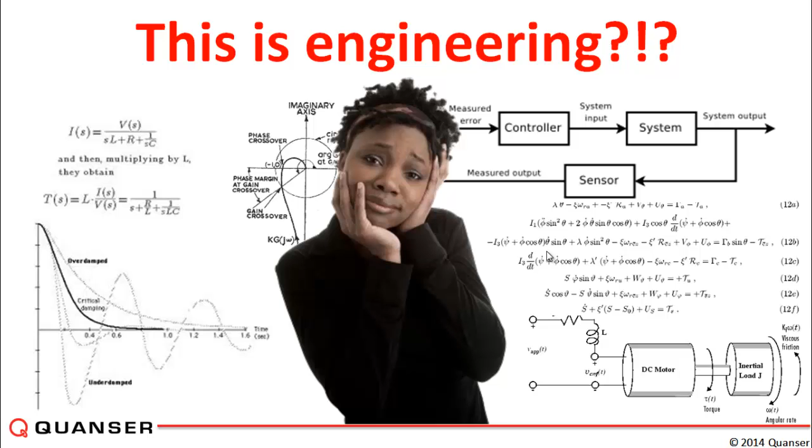I'm glad the slot for this presentation is at this time, because the previous presentation, especially what Ray began with, lays a great foundation needed to make better sense of this one. Today we'll continue the discussion and talk about whether our engineers and the graduates of today are ready for the great challenges of engineering present in our society. We're trying to address whether what we're doing in engineering departments when it comes to teaching is enough to get them ready to address the grand challenges of tomorrow.

At Quanser, for the past couple of decades, we've been trying to wrestle with this challenge. To address it, we have a wide selection of experimental platforms for teaching and research in control systems and mechatronics, and that's our history.

But more than talking about our history today, I want to talk about the higher level objectives and goals we have. Many of you or your faculty colleagues are involved with teaching courses in mechatronics and robotics, with the ultimate goal being to design a system such as this, a space rover.

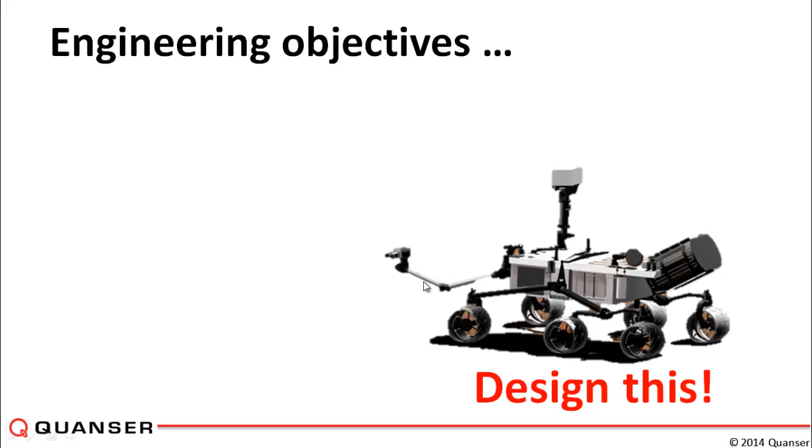We start with platforms mentioned earlier, such as Arduino and Raspberry Pi, which are gaining a lot of momentum and popularity these days, to program small hobby robotic kits at the undergraduate level. Students feel the disconnect, and we feel it too, between what happens at the programming level of that lab robot and what the reality is.

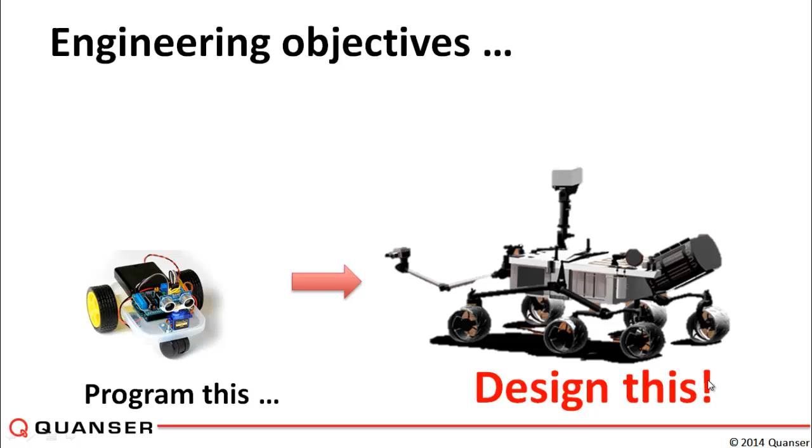One of our challenges is to make sure that the fun of programming is harmonized with the theoretical background and academic knowledge students need in order to be complete systems engineers, capable of being multidisciplinary enough to address requirements like measurement, modeling, classic control, real-time control, and overall approaching the problem as a systems engineer.

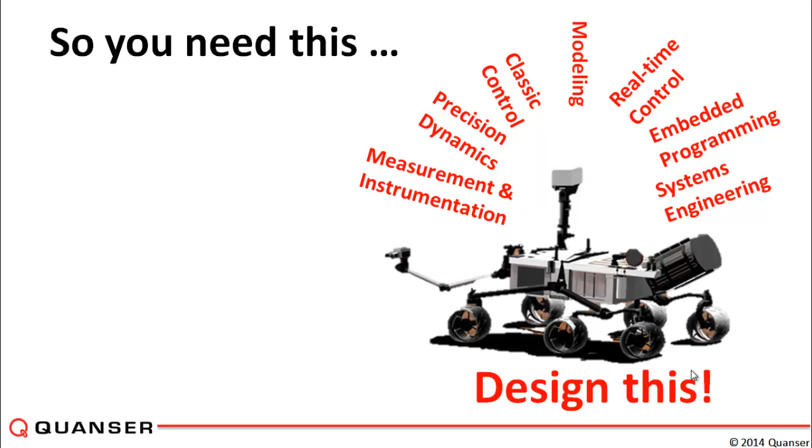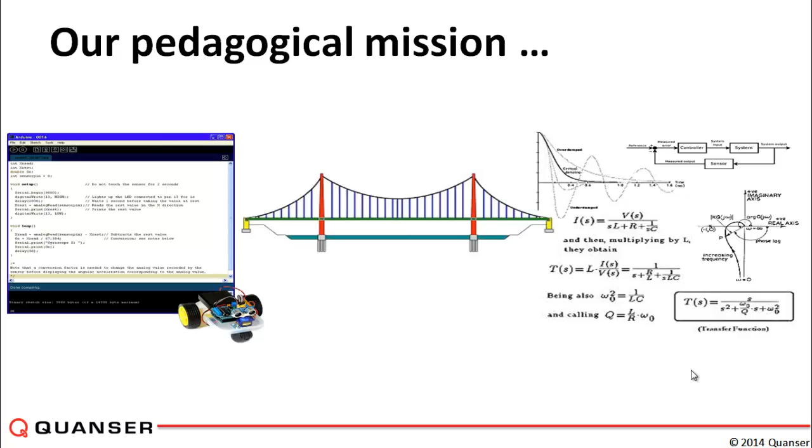Another way to define that challenge is to bridge the gap between the fun of programming that gets a robot to move and the mathematical background and abstract theory behind it, which is a very important requirement. For this audience, that bridge should probably look something more like this.

Before moving ahead, let me define a sub-goal: throughout the rest of this presentation, I want to share some ideas we're playing with in order to harmonize the fun with the theory, because both are of equal importance to us.

Throughout this presentation, I'll try to give the storyline of the life of a student coming into the school and then graduating and going out. They come in very curious, very keen, very excited, ready to learn and get involved in some of the applications they've seen so far as real engineering challenges.

Last year, and throughout some of the ECEDHA webinars we've given, we introduced an idea we've been playing with for a while: when it comes to teaching controls at an introductory level, we try to bridge the gap by bringing a game-looking application into a classic control teaching lab. So I'm going to play the video.

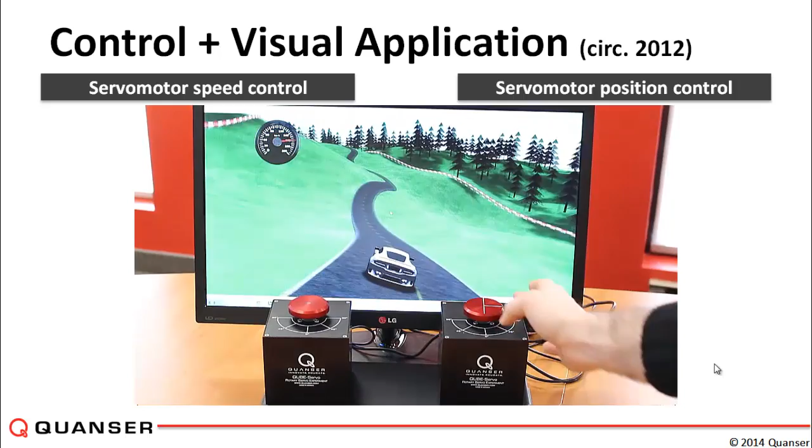What's important here is that not only does the application look like a game and seem very cool, but those two DC motors are introducing real dynamics into the whole simulation loop. As you interact with the motors, you can see that you can affect the performance of the car.

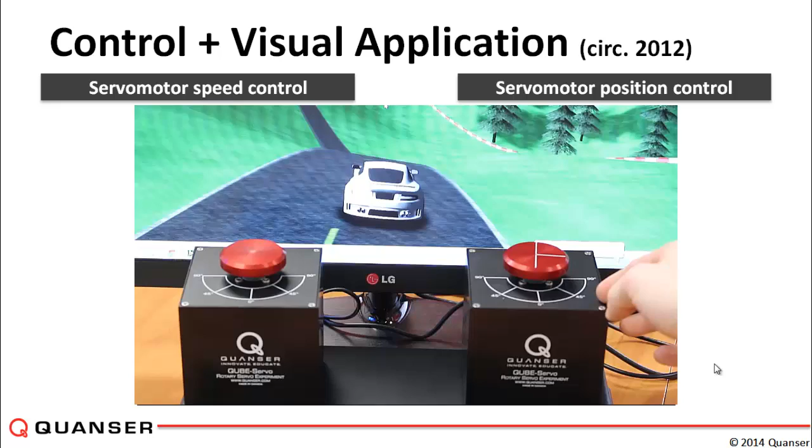And here we have the left motor representing the speed and the right motor representing the position of the car. The devices are acting as hardware in the loop devices in the entire simulation cycle, which is also a technique widely used in industry, and it's now being used at undergraduate level. That's what we introduced over the past year or so, and we've been playing with.

So moving ahead, before introducing this is how controls was taught in undergraduate labs. There's a device, a DC motor, that was usually looked at as the star of the show. And that's what I want to argue throughout the rest of the presentation, that's not the case actually. So the servo was the star of the show.

We have some software environments such as LabVIEW, which takes charge of the control and data acquisition and interfacing to hardware. And then we feed it some abstract signals and study through that the concepts of modeling, PID, speed, position control, and all the classical control topics that come with it.

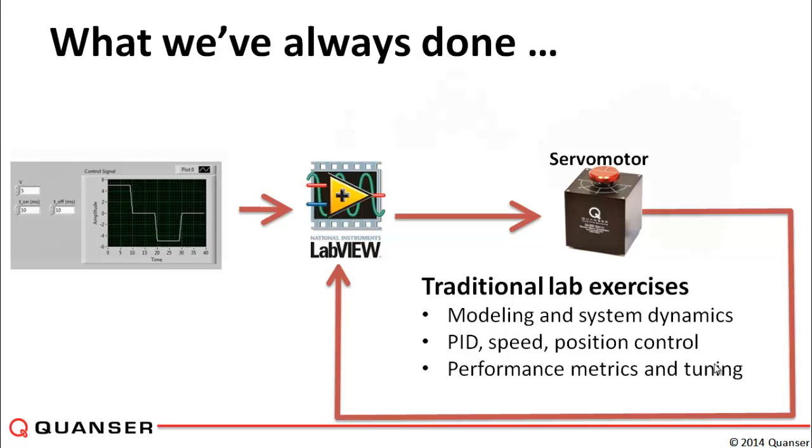So what happened with the QDS or the driving simulator example that I showed you was that we added a hardware in the loop application, and we wrapped the whole lab with this application, which is very rapidly interchangeable, and in that case was an automotive application.

So not only were we covering again the classical concepts that I just mentioned, but through this addition of game controller input devices and also the automotive model, it now opens the door into a much wider range of applications and teaching topics that students will get a chance to work with, not only on the classical control side, but also things such as the main applications, sensors and encoders, the fidelity of the model, signals, data acquisition and filtering, and even human factors, because there is user interface design involved, and there's a lot of parameters that you wouldn't normally touch on if you were just teaching classic controls.

Keep in mind that we are still using the same two platforms, but now instead of looking at them as the star of the show, we want to look at them as a system component of a much bigger system and solution that we're throwing in front of the student.

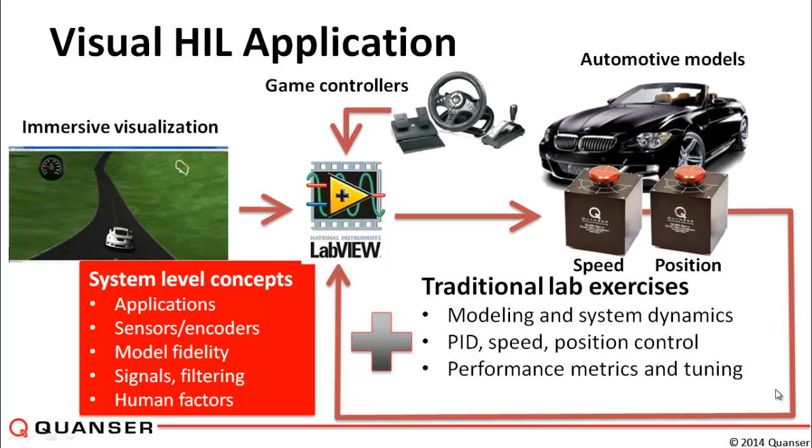So a little bit about that QUBE that we saw. It's basically our new DC motor control experiment that's recently designed. It's our latest technology in DC motor control, and it's designed to be affordable to equip multi-workstation labs, and it's designed specifically for teaching at undergraduate level in controls. A little bit more about that is coming up shortly.

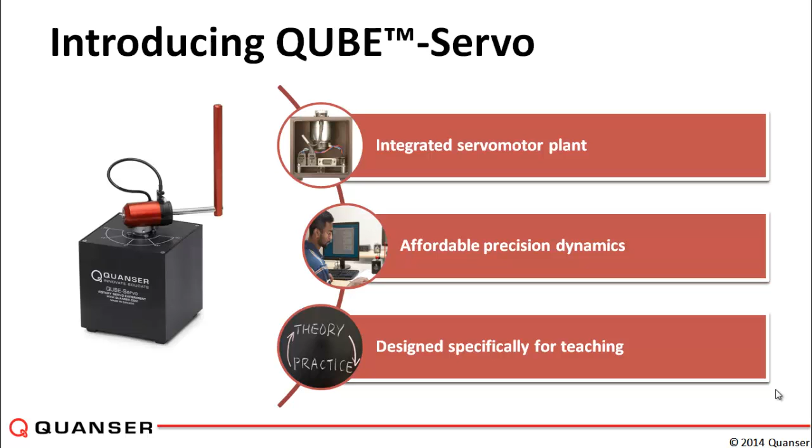So now I want to move to the second part of the storyline, where that curious student we saw at the beginning is now starting to think. When they come and start working with these devices, they have to think in order to get them to do what we want, what we're asking them to do.

And in order to do that, of course, we cover all of the classic interesting control topics: modeling, stability, frequency domain analysis, time domain analysis, and in more advanced courses, maybe state feedback, LQR control, observability, and things of that nature.

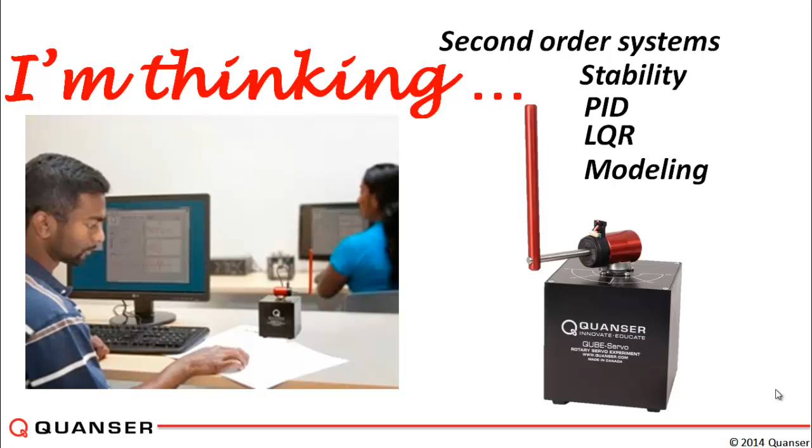But again, going back to the beginning and looking at the QUBE as the star of the show and as a control plant, I just want to show through this video that it actually does work, and it does what it's supposed to do as a control plant, satisfying the objectives of a control problem to swing up and balance the pendulum, which is one of the most famous problems in controls. It does that, and that's great. And through that, we cover a lot of material in basic control theory.

But now, what if we wanted to think about the QUBE as a system component into that whole objective that we defined for ourselves at the beginning? What if we wanted the students to actually do a little bit of engineering? This couldn't match any more perfectly with what Ray showed earlier on when it comes to doing engineering.

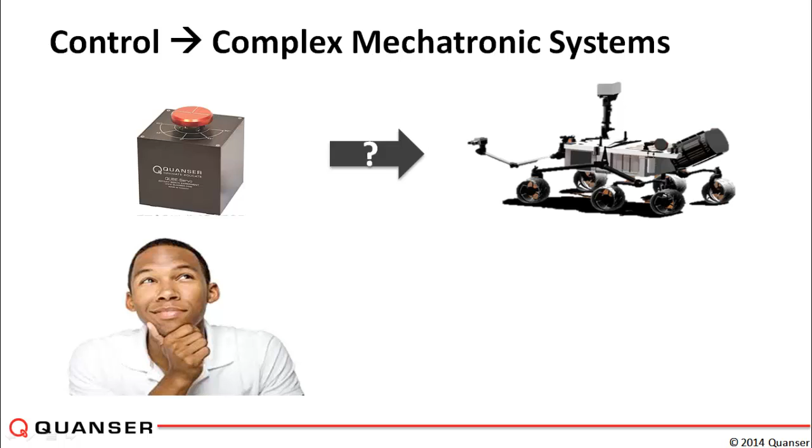And it's now time to actually introduce you to another new product released by NI, called the myRIO. I'm sure we're going to hear a lot more about it throughout the conference. But when you put the QUBE together with the myRIO, you have this very powerful platform that is now a complete solution for systems design, and not just for control teaching.

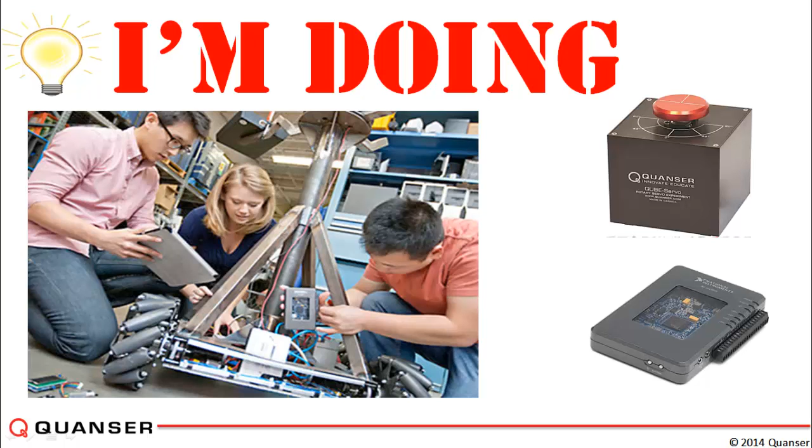This is a video from earlier last year from NI Week 2013, where we wanted to prove to ourselves, to NI, and to everybody else that while the NI myRIO is a device targeted at student design projects for undergraduate, master's and PhD level, it's definitely capable of doing computationally intensive tasks such as controlling a quadrotor, taking advantage of its low footprint, small power requirements, and capability to run on an unmanned vehicle.

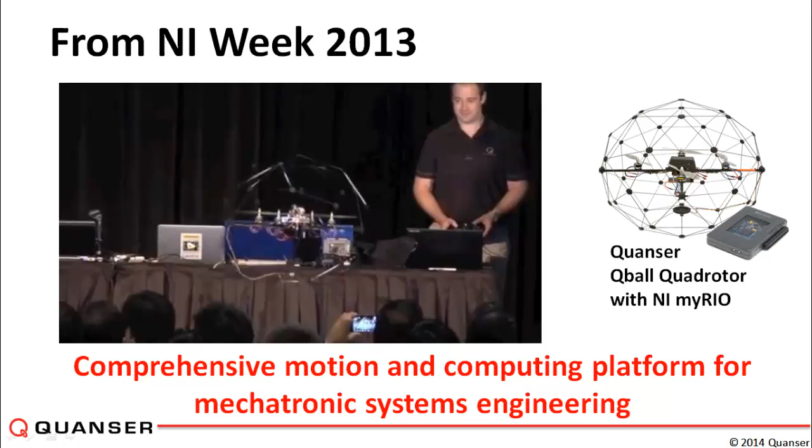So it's definitely great, but none of us have the budget or luxury of putting a 20K quadrotor in front of every undergrad student. So what's the next best thing we can do? That's when we started putting together the QUBE plus myRIO solution.

But before talking more about that, there's this cool video I wanted to show. This is a device on the QUBE that normally doesn't come with it. It's not even designed or offered as an official product.

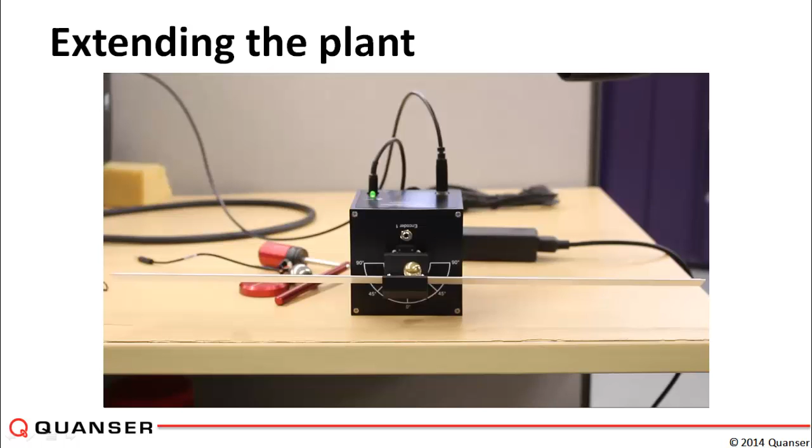For those of you involved in controls, this is a nice technical demonstration of observer-based control and observability. But for those who don't care about controls as a system, you can see that with some common hardware store parts and a small magnet, we were able to create a completely new experiment with an existing device acting as our precise dynamics. We, or a student, could have gone ahead and put this together, opening the door into a much more advanced control problem that wasn't offered out of the box with the QUBE.

And that's the main point I want to get across here. With some common parts and creative fabrication, students now experience a systems engineering or design experience rather than just a classic control problem.

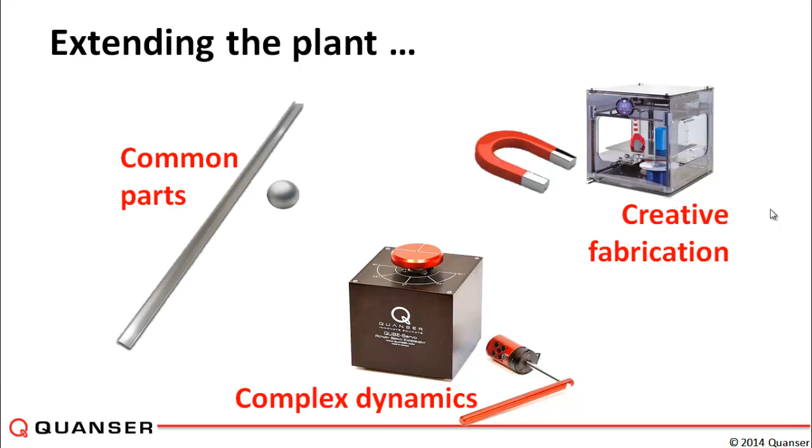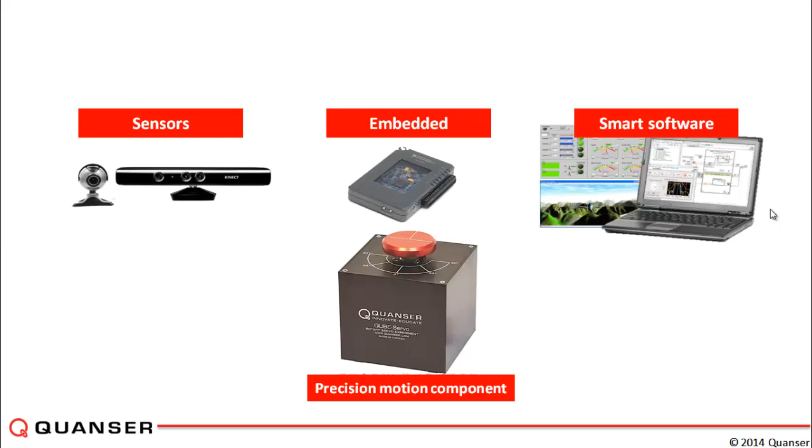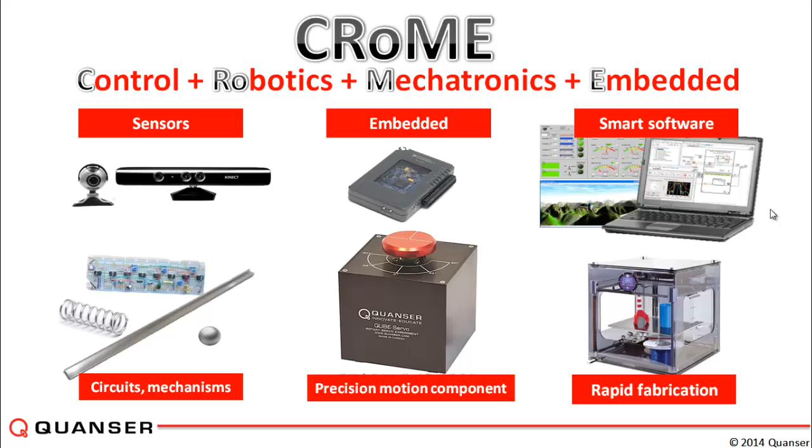Sorry I have to go through this a bit faster than anticipated because of the videos. Another example that shows how powerful this solution is: using rapid prototyping tools such as 3D printers, which were used to design that module, we came up with this next example where, through a Kinect or camera which the myRIO is definitely capable of supporting and computing on, we can extend that previous example.

Of course we'd love to use the observer because that's more challenging, but if you didn't feel like designing the observer, you could use this camera to track the position of the ball and control it. But again, the control problem itself is what we talked about at the beginning. This is just meant to show that the QUBE is a system component, a mechatronic or robotic system component, rather than an end-user control plant.

This QUBE and myRIO solution is part of a much bigger ecosystem we're now working on with our partners at National Instruments, which starts at an earlier level of undergraduate studies with simpler plants, and extends into the whole undergraduate and graduate advanced research ecosystem with more advanced platforms and plants, all centered around the software framework provided by LabVIEW and our Quanser RCP toolkit for rapid control prototyping. The whole solution spans nicely across the undergraduate and postgraduate V diagram as you see here.

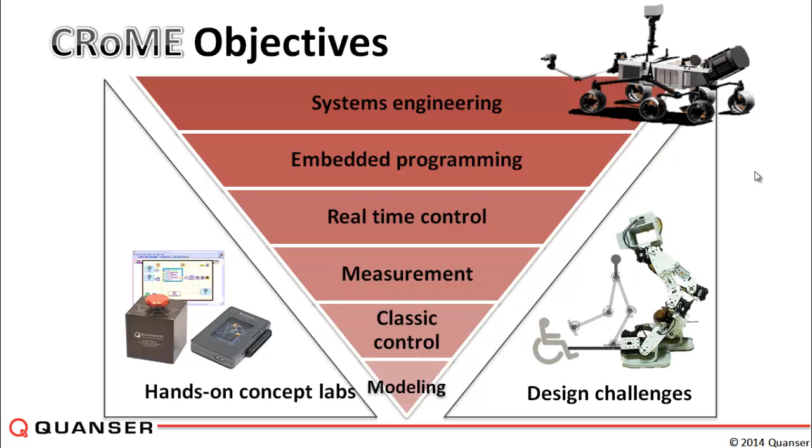That V diagram can be looked at another way, going back to the beginning of our presentation, where we talked about classic control topics and the modern embedded world and systems engineering world that's happening. You can see that systems engineering wraps around all the smaller subtopics we talked about, starting at the bottom with modeling and ending with the systems engineering solution that fosters students' thinking.

And finally, the curious student who came in, started thinking, started doing, and now it's all about readiness when shipping them into industry from school, to make sure they're ready to tackle the challenges of engineering.